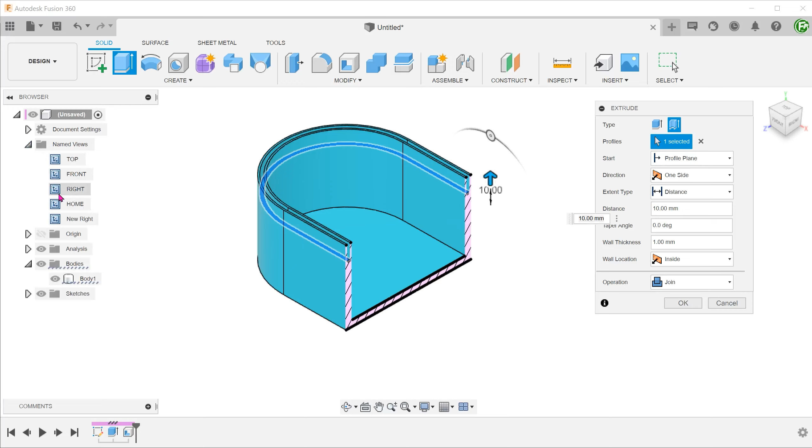Let's start the extrude command and select the Thin Extrude option. Select the open face as a profile and drag the arrow up. This creates a groove structure with two side walls. The Thin Extrude option recognizes two closed loops in this case and gives thickness to both loops. We do not have control over which loop to choose, so obviously this is not going to work for creating lips.

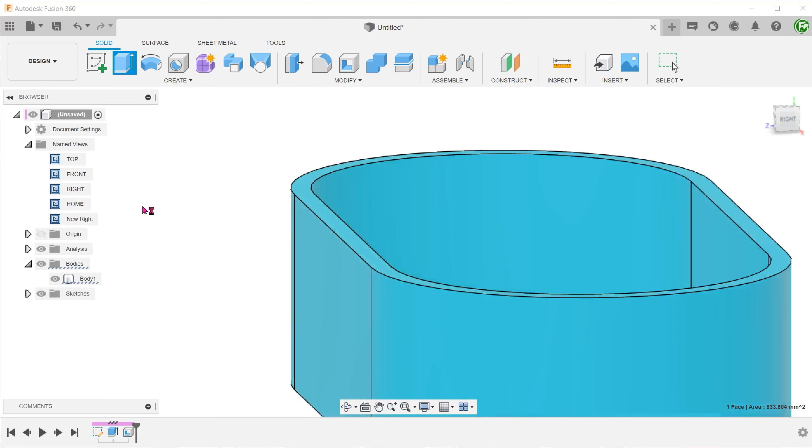A quick way to resolve this is simply to create a lip before the shell. So let's roll back the timeline to before the shell command.

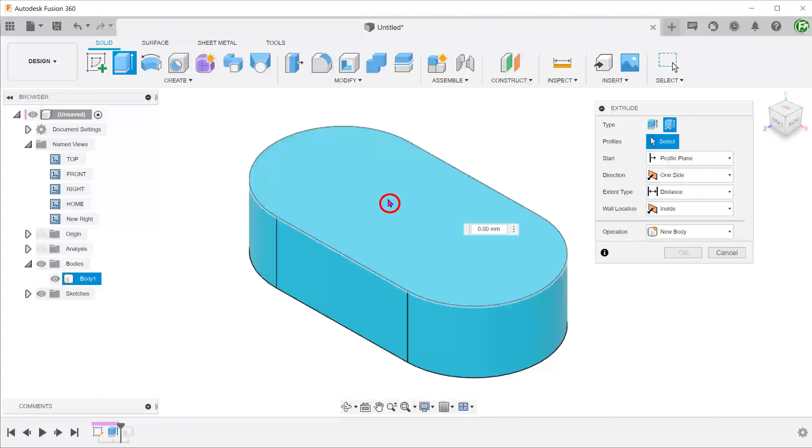We will be creating a lip along the external edge of the open face. Begin the extrude command, select the Thin Extrude option, and select the top surface. Adjust the lip height and wall thickness. Since there's only one loop in this case, the Thin Extrude would add thickness only to this loop.

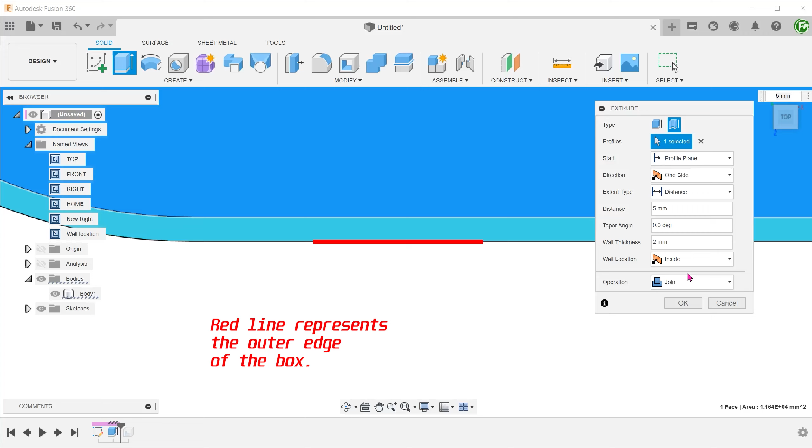We can adjust the wall location. In this case, we want the wall location to be on the inside. Confirm the extrude and roll the timeline forward to after the shell command.

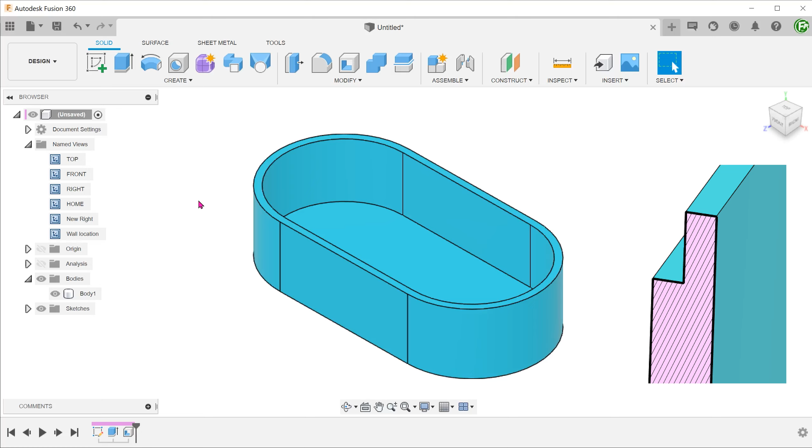We won't be able to create a lip along the inside edge using the previous method. We would have to perform the shell first. With the box shelled, begin the extrude command and select Thin Extrude. Instead of selecting the top face of the box, we shall select the inside base face.

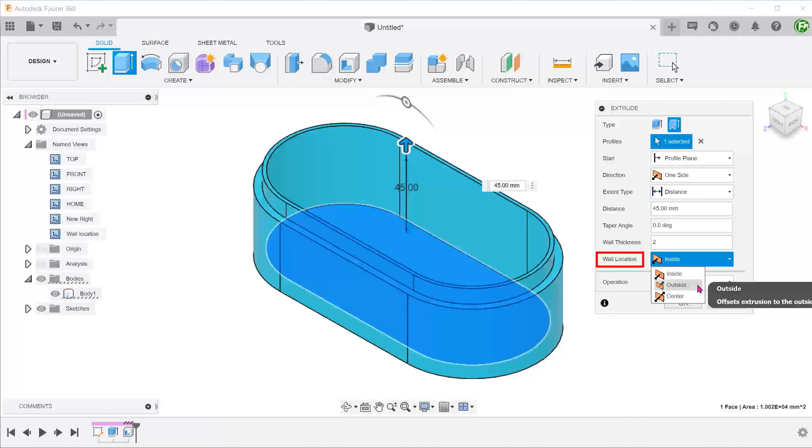Let's drag the arrow up. Adjust the wall thickness. To ensure that the wall thickness of the box below the lip remains unchanged, we need to adjust the wall location to be on the outside. At this point, Fusion recognizes this as a cut. Change the operation to join.

So this seems like what we are looking for. But let's make this parametric by taking reference from the existing top face. For extent type, choose to object and select the top open face.

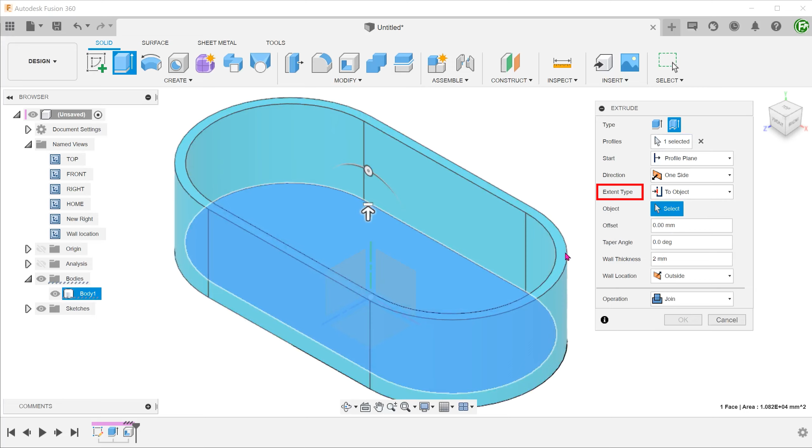The selection can be a bit tricky here. If we hover the cursor over the face, you can see the subtle highlighting of that face. If we hover the cursor over an edge, the whole body gets highlighted. If you need to, zoom in to make a more accurate selection. Watch out for the subtle highlighting of the face before clicking.

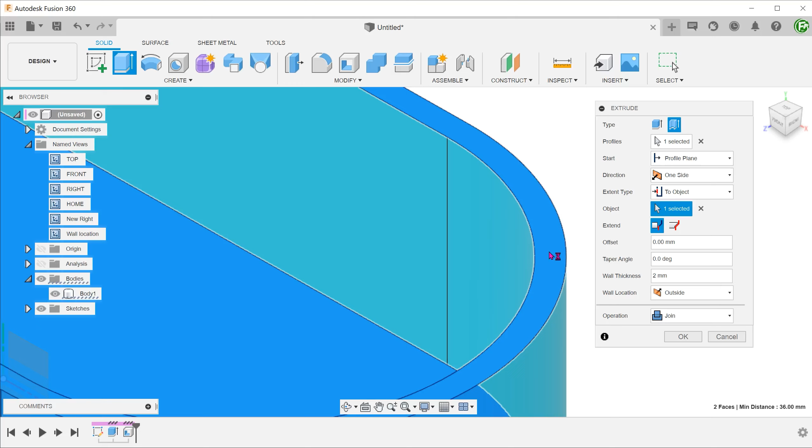You can see that the arrow icon changes. At this point, resist the temptation to drag on the arrow as that will change the extent type back to distance. Instead, enter the offset numerically. Confirm the extrude.

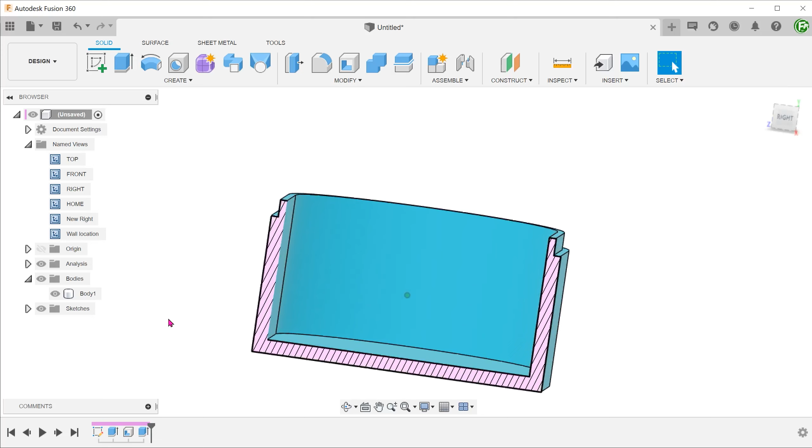If we adjust the overall height of the box, the lip maintains the same relative height from the open face.

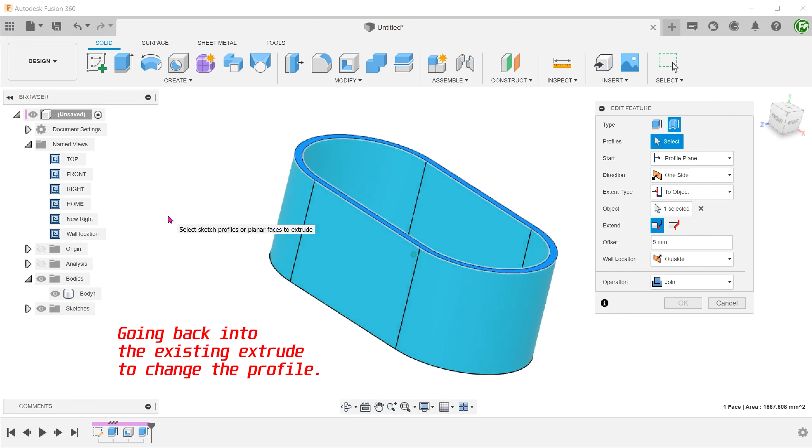As a side note, we can follow the same workflow to create the outside lip. For that case, we would have to select the outside base face as a profile.

For non-planar boxes, I have had mixed results when I try to create an outside lip before performing the shell. Sometimes the shell would fail, so I would recommend doing this after the shell instead.

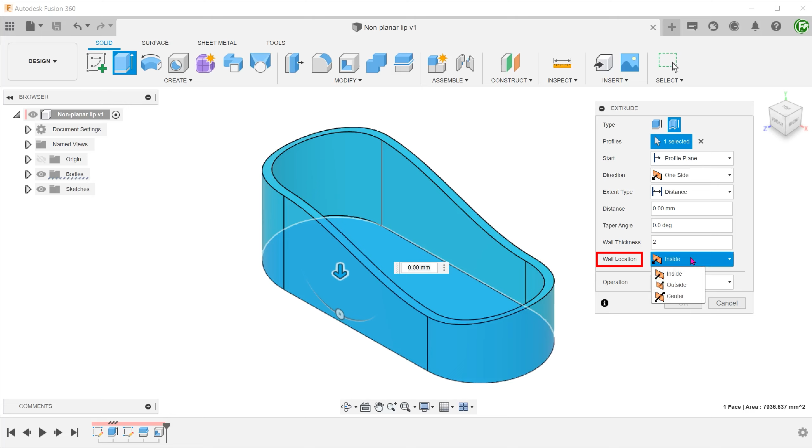Start the extrude command and select Thin Extrude. Select the outside base face as a profile. Adjust the thickness, and make sure that the wall location is on the inside. If we drag the arrow up, Fusion recognizes this as a cut, so let's change the operation to join.

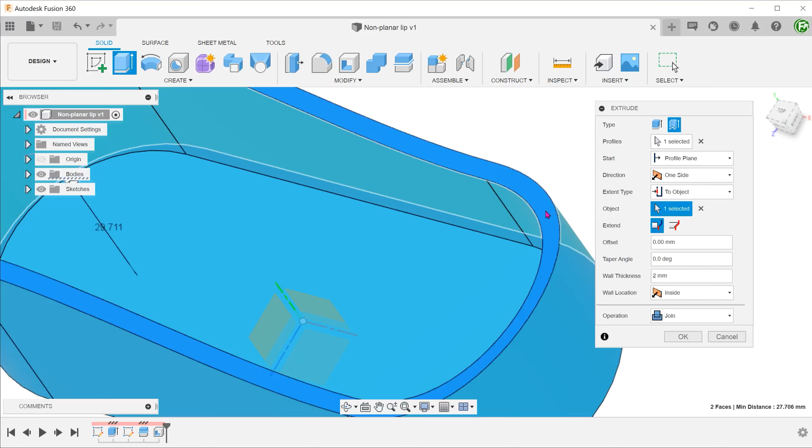We want to take reference from the curved open face. For extent type, choose to object and select the curved open face. Adjust the offset. You can see that the lip follows the curvature of the original top face.

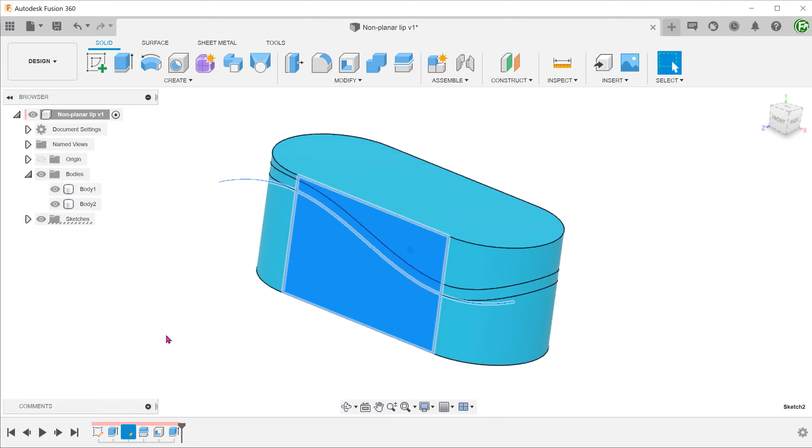This box was created initially by using a spline to split a regular rectangular box. If you adjust the split line, the lip maintains its relative height.

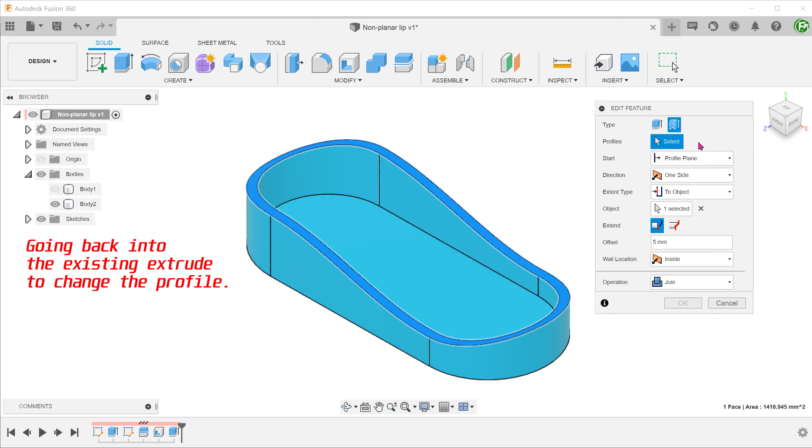We can apply the same workflow to create an inside lip. For this case, select the inside base face as a profile. Set the wall location to outside.

There's a limitation to the workflow that I have shown here. It can only be applied to boxes with flat bases. So do take note of that.